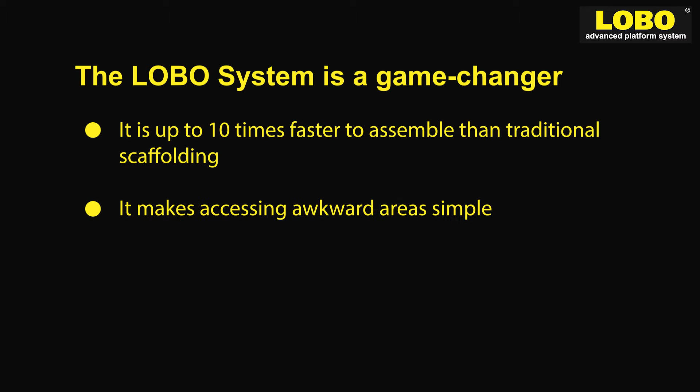LOBO Systems is a game changer. It's up to 10 times faster to assemble than traditional scaffolding. We want to make accessing your awkward areas simple, reduce your cost, and increase safety with our tried and tested training program.

Now these units are currently vertically aligned. You can put them horizontally and you can fit wheels to them. So Paul is now going to take some product out of the smallest Towerstore we have.

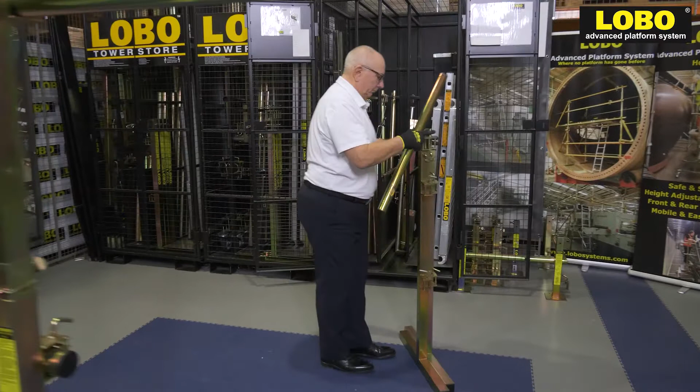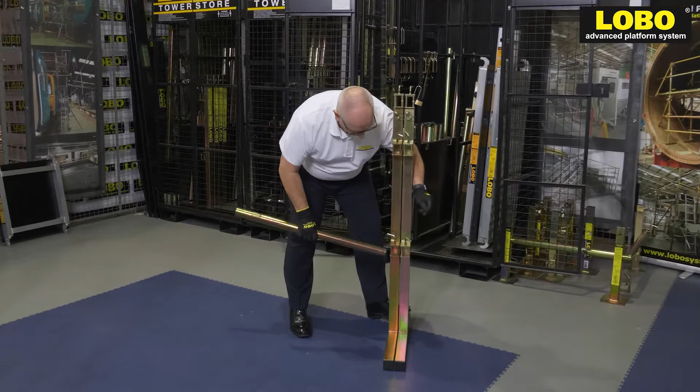As you can see, that's 2 legs. LOBO is in fact a steel system, very strong, and it assembles by sliding the tube into the clamp, which are then tightened by your fingers.

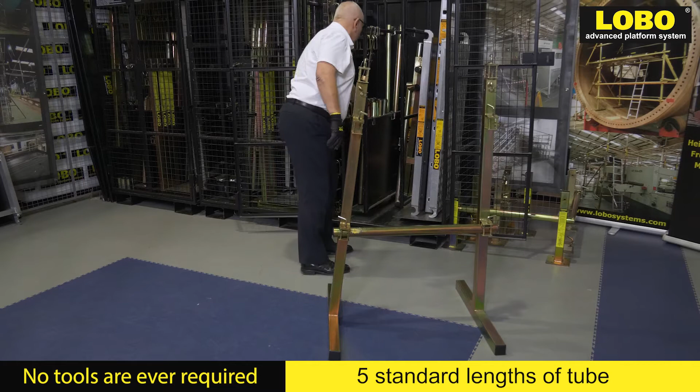No tools are ever required, and that length of tube is one of 5 standard lengths that we provide, but you can have custom cut to suit your applications.

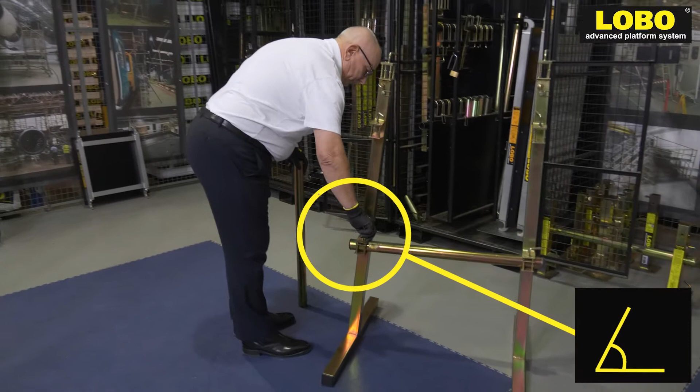The important thing to grasp is that the leg can be positioned anywhere you like on the tube, making the width of the product totally adjustable. Paul's going to now tighten the second L-bolt, and you'll notice the system is in fact self-aligning.

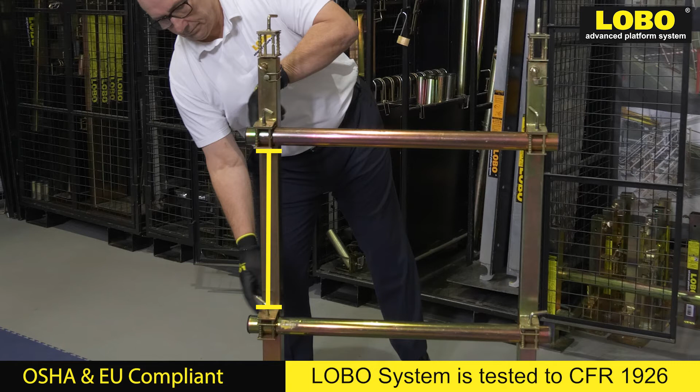Building the product is easy. You slide tube into the clamps, and the clamps have been positioned in accordance with OSHA CFR 1926. The whole product has been tested to CFR 1926 and is OSHA compliant.

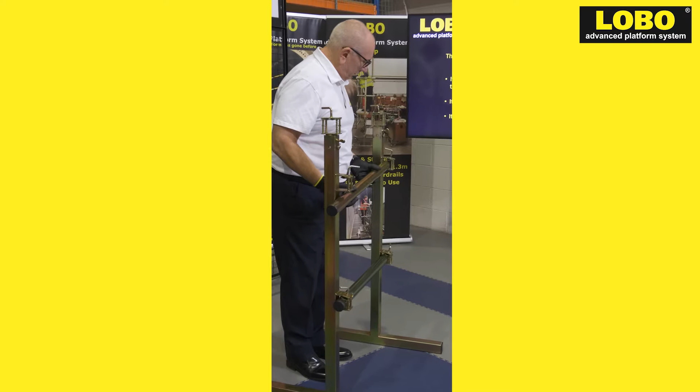What Paul is doing now is showing you that you can actually build LOBO from within. So if you're in a confined space, maybe a staircase or inside a vessel, in between 2 machines, you can often build LOBO around you, and you don't necessarily have to step outside the system to build it. So that's one system done there.

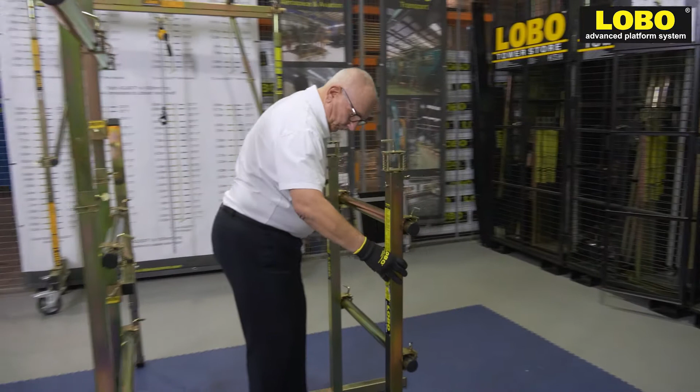Now we're just going to briefly explain, on the left here. We've done this to save a little time, but this system is relatively small by our standards. We can build LOBO around a tailplane of an aircraft or around a ship. It's as big as you want it to be.

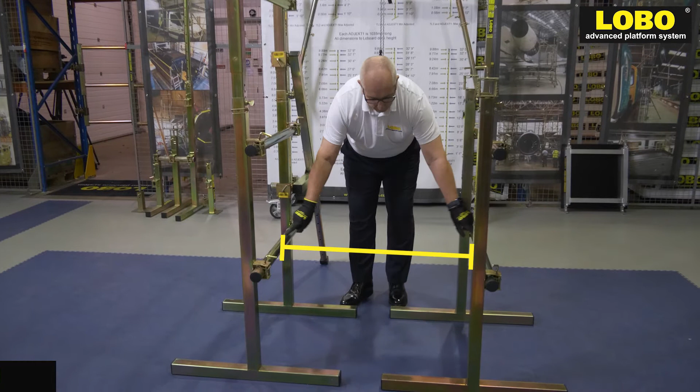But this system is actually ideal for explaining the safety aspects and how quick it builds. That distance there we call the span or length of the product, and that is adjustable from 2 foot all the way up to 12 foot in 2 foot increments.

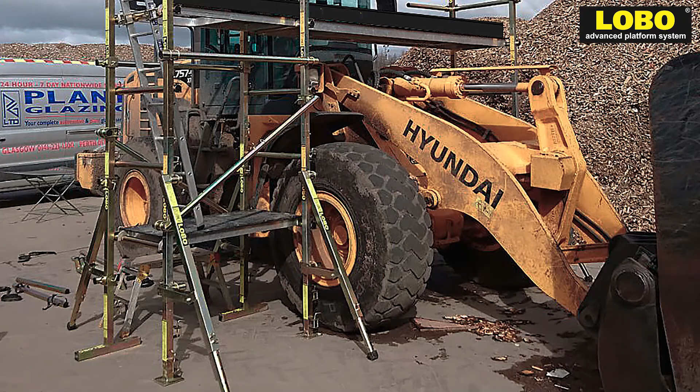So in that span you would see the conveyor, the machine, the aircraft, the helicopter, the jet engine, whatever it is you're maintaining. And we do it with these different size LOBO boards, non-slip on this side, aluminium framed on the other.

This is what a 1 foot board looks like when compared to a 2 foot, and these are the 2 width options that we provide.

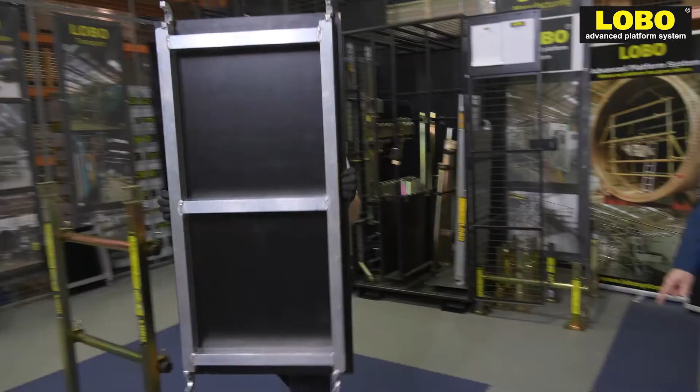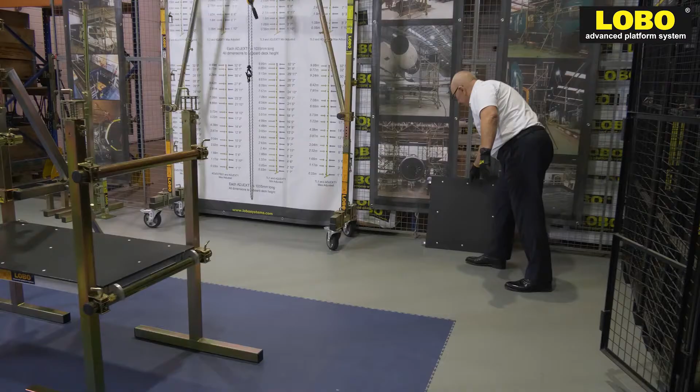Now Paul's got the 4 foot LOBO board, which is obviously relatively small by our standards, but however very popular. Now if this was the 6 foot board or the 8 foot or the 10 foot, you'd still do this to adjust it. So LOBO can actually be made infinitely long by adding more LOBO boards like this.

More LOBO boards, more legs, more tubing can go on the length infinitely, and you can do exactly the same on the width. By adding more boards, legs and tubing, you can make the product as wide as you want, as long as you want, and of course as high as you want.

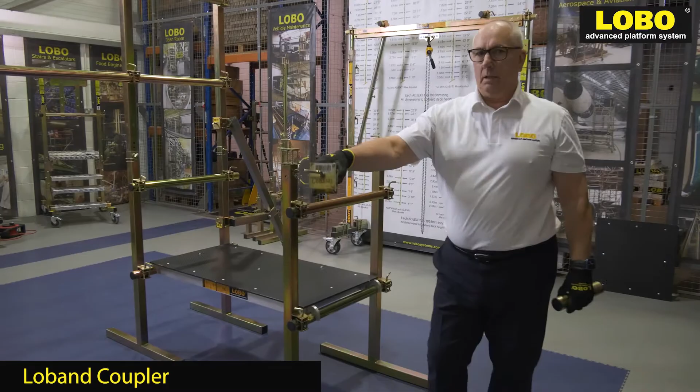Before we go into that, we're just going to introduce this coupler. It's called a Loband coupler, and what it does is it couples round tubing to square tubing in seconds, no tools required. Just like that.

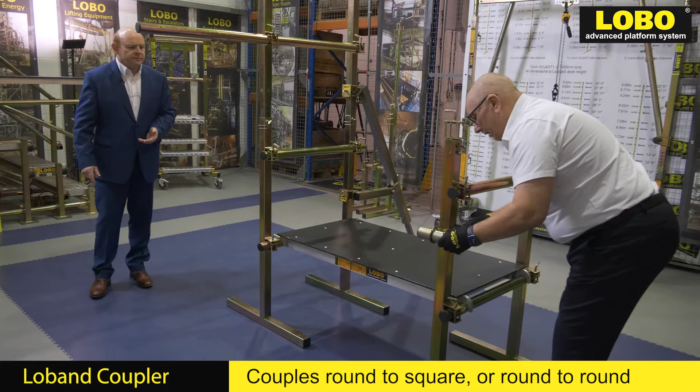It'll also couple round tubing to round tubing, just like that, in seconds, no tools required. Now this little coupler is hugely important to us because it'll make your system very small or very big, but rock solid. It'll also increase the safety.

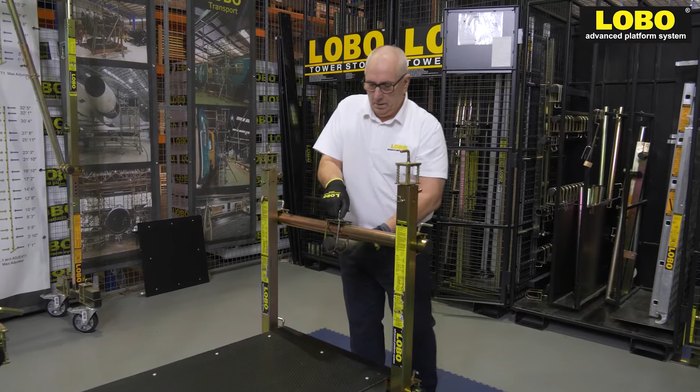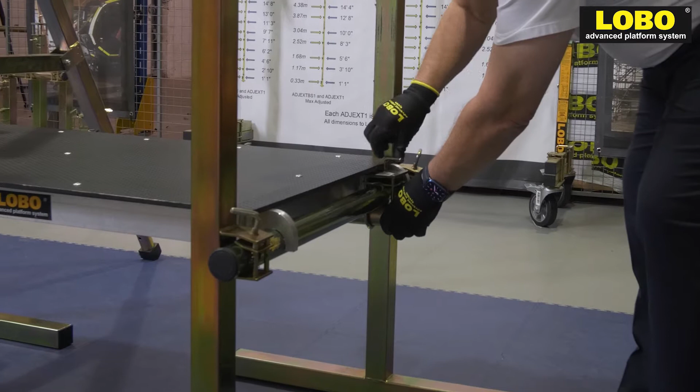So what we're going to do now is show you how we lock the LOBO board down by using the LOBO band and a piece of tube. As you can see, it will not lift up and it will not slide on the tube. This means you can actually position a LOBO board anywhere on the length of a tube.

The next thing we're going to show you is how quick and easy it is to fit a guardrail. That's a guardrail tube going on there.

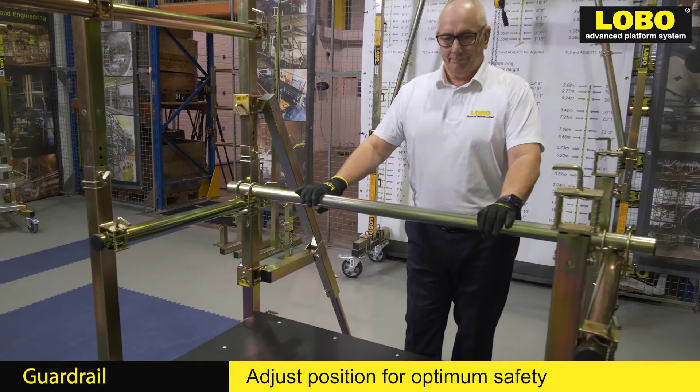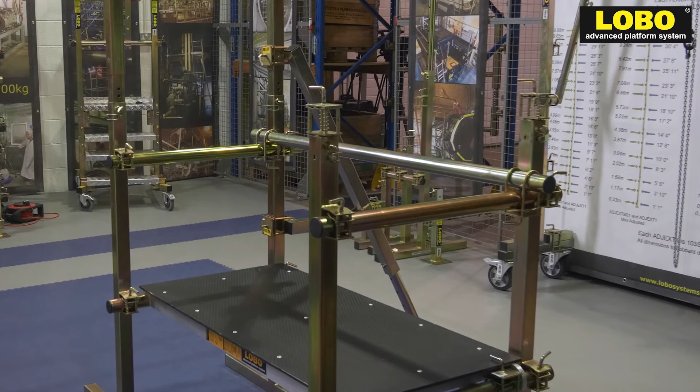Seconds later, it's now on the system, and what we're going to do now is show you that you can actually adjust the position of the guardrail to maximize your safety requirements for your specific applications. When you have it exactly where you want it to be, all you do is tighten up the L bolts. Now with that LOBO band coupler, you can actually fit a guardrail anywhere you wish on the system.

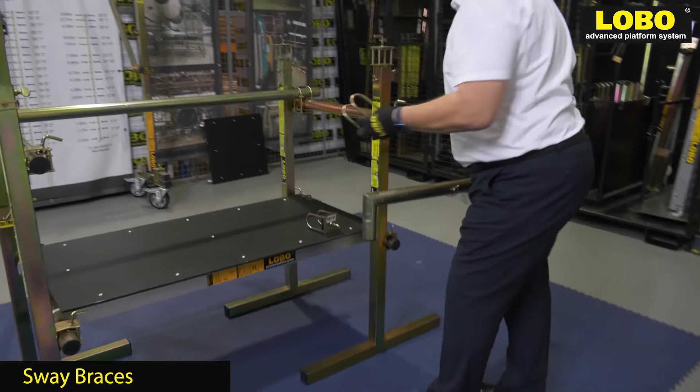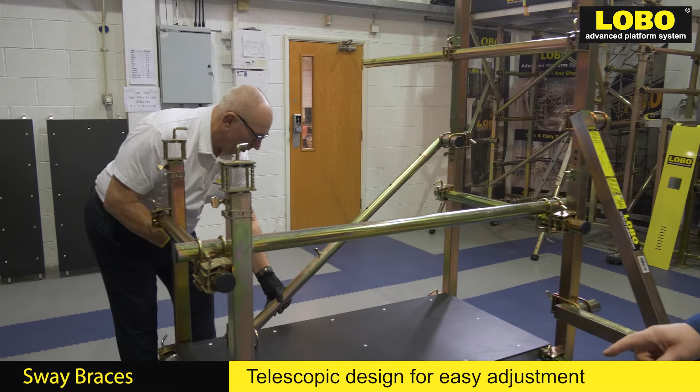Now, because LOBO can be made into a very large system, we need to use these sway braces. This is in fact the smallest sway brace that we have. There are two larger sizes, but they all go on the same way, in seconds like this. If you look at this, you'll notice that it's actually too short. Not a problem. We can take the pin out and telescopically adjust this so that it ends up touching the leg, fitting exactly where we want it to be, and then we simply take a LOBO band and connect it up. It's that simple, it's that quick.

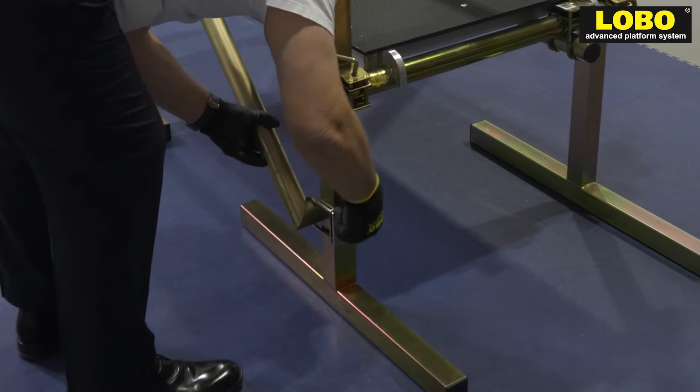Now if you look at this system from here, you'll see this cross piece here, we call sway braces, allow you to make a rock solid system to a maximum of 30 feet freestanding.

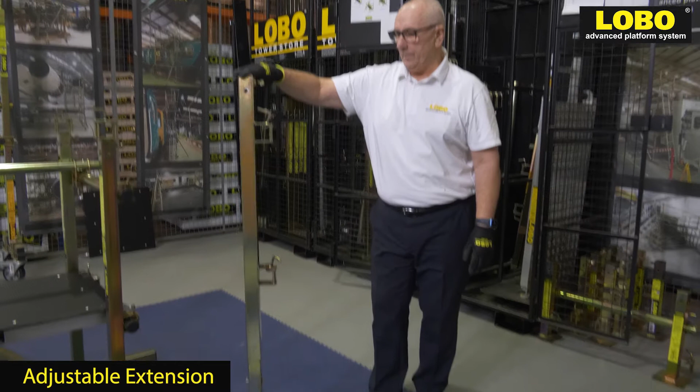To get to 30 feet, let me show you the extension piece. This is in fact a steel component and adjustable at the bottom.

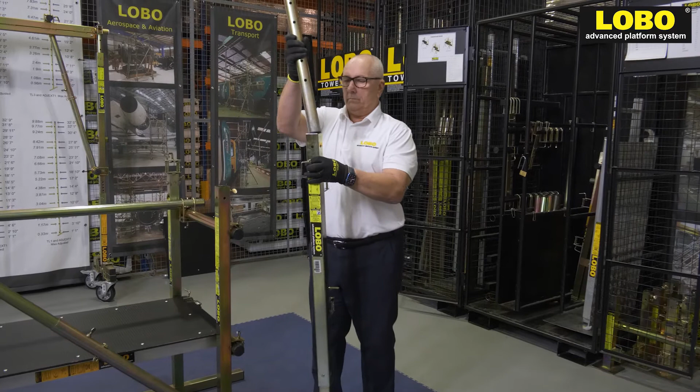Now we have a process for putting this on, or fitting this. It's called the advanced guardrail process. Don't worry too much about the detail. It's fully covered in our training program.

But what it really means is as you build the product, there's always a guardrail in advance of you for safety. If we approach and do the audio test, and then we turn it off, we can actually see we're building a rock solid system, noiseless, and that's exactly what we're looking for. And then we simply fit the adjustable extension in the top of the leg.

So now we're going to show you how the product adjusts. You can see there we've got 1 foot of adjustment in 1-inch increments, and this is available every time you put one of these components on the system, all the way up.

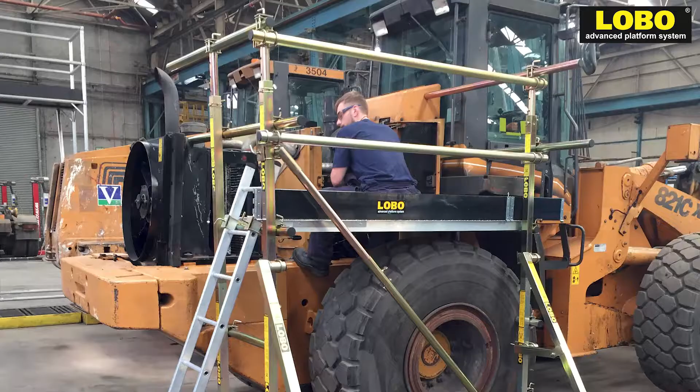Now as you can see, Paul's setting that side to 2 holes. If you come to this side of the system, you'll see that's 2 holes too. Why? Well, because we're on flat or level ground. If we weren't on flat or level ground, we're on a slope, a step, escalator, tiered seating, just different levels within the plant or facility, you could set one side of the system different to the other to achieve a level platform.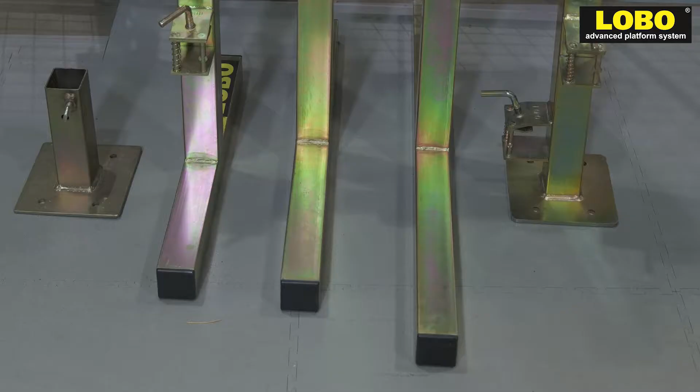If you don't want to do that, then the other option is to use our different leg sets. The little number 1, the medium number 2, and the large number 3 we're using. Now, since all our legs are interchangeable, you can mix and match to get the most perfect system to suit your requirements.

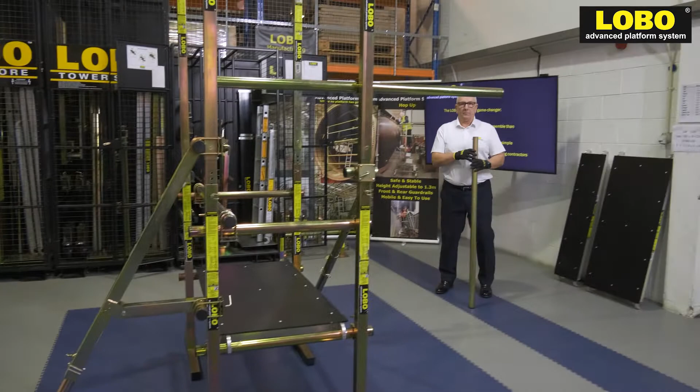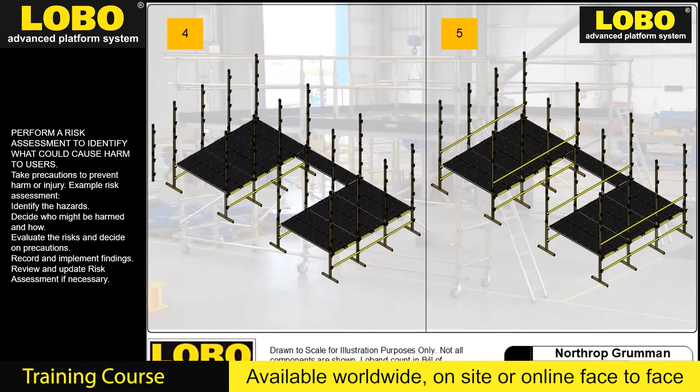Now, as a responsible manufacturer, we've developed our own training course. This training course is available worldwide, on-site or online, face-to-face. Once you've completed the course and passed the test, you are then deemed competent by us, the manufacturer, to be able to build your system, inspect it for safety. You need to record that fact, and then it's safe for everybody to use.

To go to the next level, we simply take more tube from the Towerstore unit, which we fit onto the next clamp. Now that tube that Paul is about to fit is exactly the same as this guardrail tube, so you're not going to get confused about which tube to use.

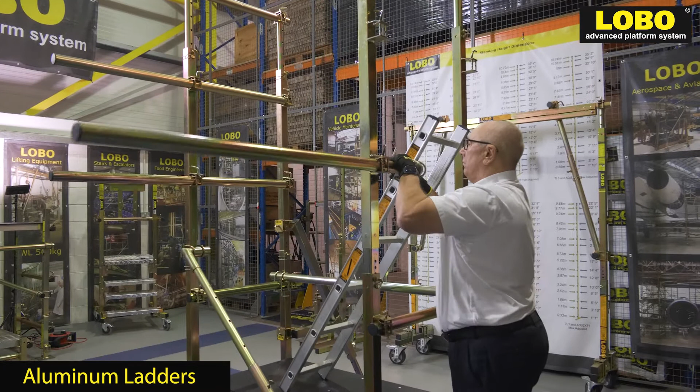To get to the next level, we use aluminium ladders as the cheapest option that we have. Now, the aluminium ladder is from a range of ladders that we have. What's important is the use of the LOBO ladder clamp.

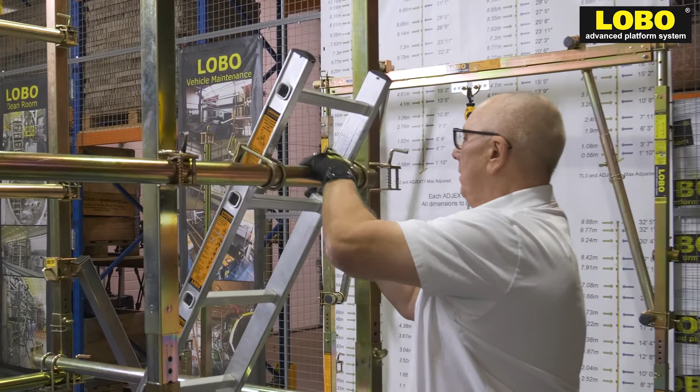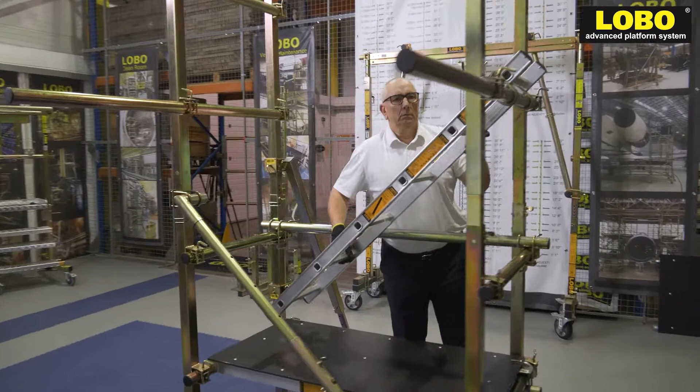The ladder clamp, in fact, we're going to use 2 ladder clamps. And once we've tightened up the L bolts that Paul's now doing, that ladder will not come off the system. But you can see it can be adjusted to suit the application, and then you simply tighten up the L bolts, and then it won't move.

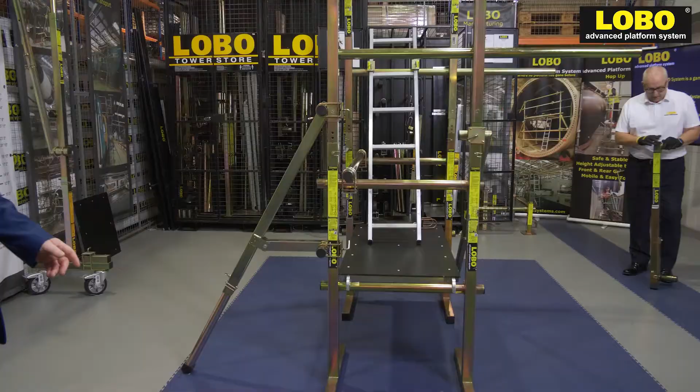What I'd like to do now is explain a safety aspect that we have for the product, which is the height to base ratio. As an example, this width of the system here is 32 inches. The maximum we can stand at is 3 times 32, which is 96 inches, right around 8 foot.

So what do we need to do to go higher? Well, the first thing we can do is we could take that tube out and put a longer one in. This leg would move out to the end of the longer tube, thus giving us a wider system.

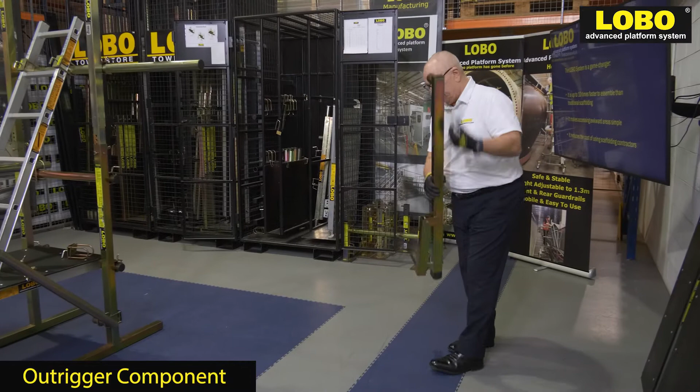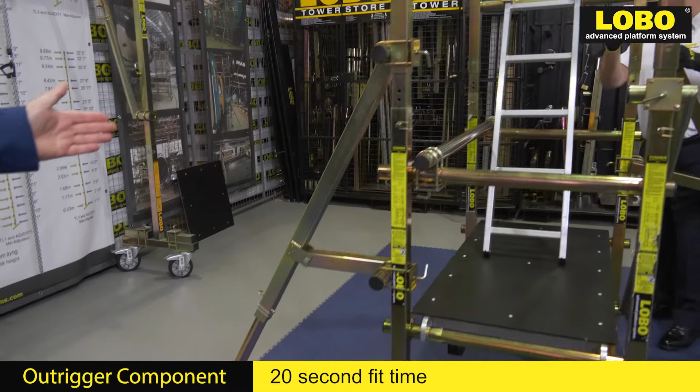If you can't do that, you need to use an outrigger component. This is a steel component. It has a 20-second fit time, as we're about to show you, and we've put one on this side to save a little bit of time. As you can see, the 20 seconds is up, the outrigger is fitted, and we're going to deploy the rubber foot. That gives us another 36 inches on the base.

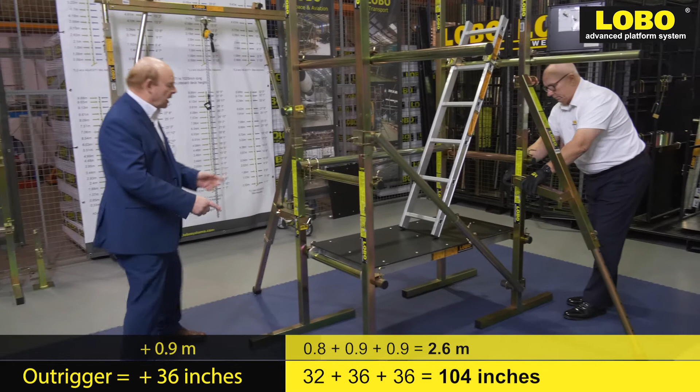36 inches now, with an additional 32 in the middle, and the one we put on previously gives us another 36 inches. That gives us a total new base dimension of 104 inches, which, when multiplied by 3, which is a safety factor, you can now stand at 26 feet.

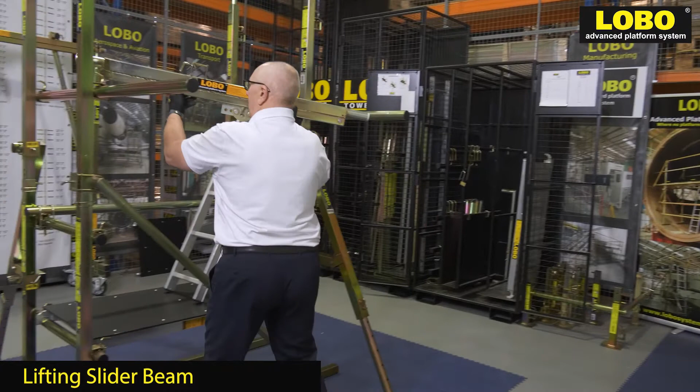Another component we like to show at this point is the lifting slider beam attachment. This is in fact the 4-foot version, and we're using the 4-foot because we have a 4-foot Loboard. They're a matching pair. However, we do have 5 different lengths of this product. The next one would be the 6-footer, which we've set up here.

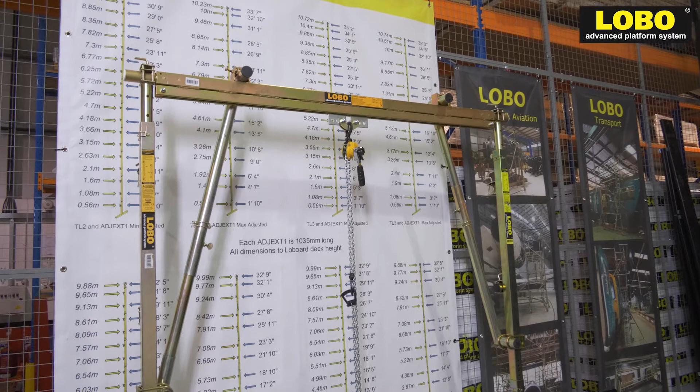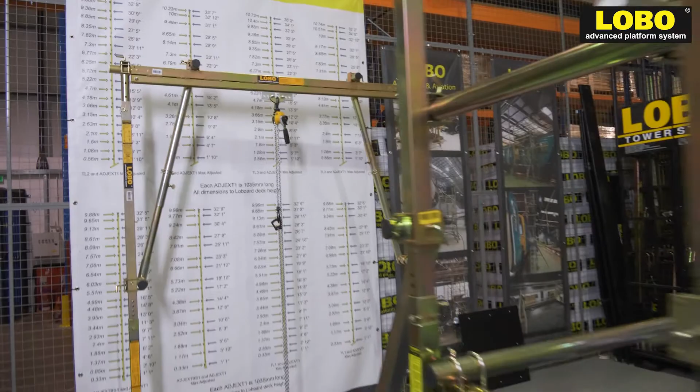Now, we've set this up slightly differently because we wanted to explain that it can be set up freestanding, and in this case we've added a wheel kit. However, returning back to the integrated version, you can see that Paul's put a Loboard on to integrate it on the product. It comes with a certificate of 1,100 lb safe lifting load, and you get that certificate every time you purchase one, and also it's a slider beam.

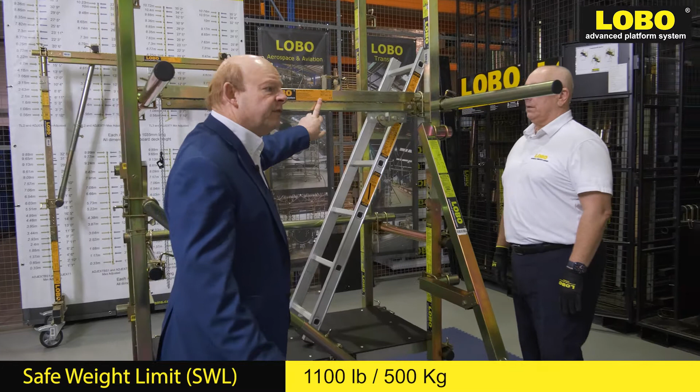Now, the slider beam means if you've got compressors, motors, tools, anything that you want to get up the system or bring down for repair, you now don't have to carry them up and down the ladder.

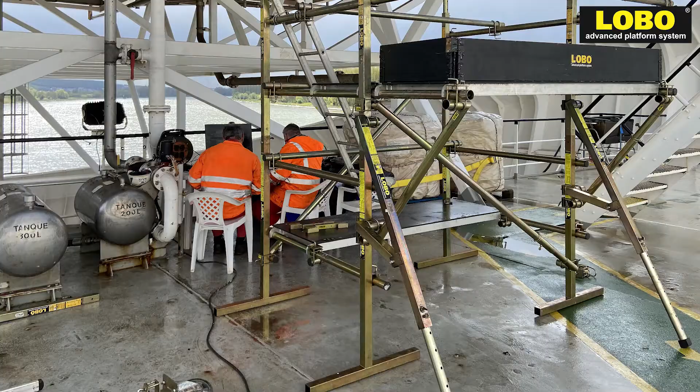The next thing we want to explain to you is the cantilever. This tube here and its friend on the other side is the basis of a cantilever that we're going to build right in front of you. Now, following certified training by us, you can put this height at anywhere you want on the system. And the cantilever gives you the opportunity to stand outside of the main system footprint.

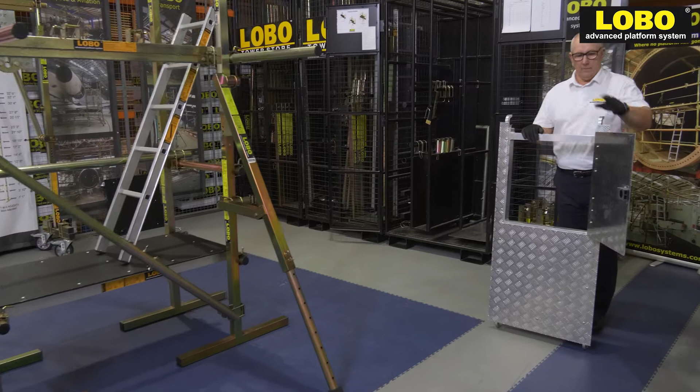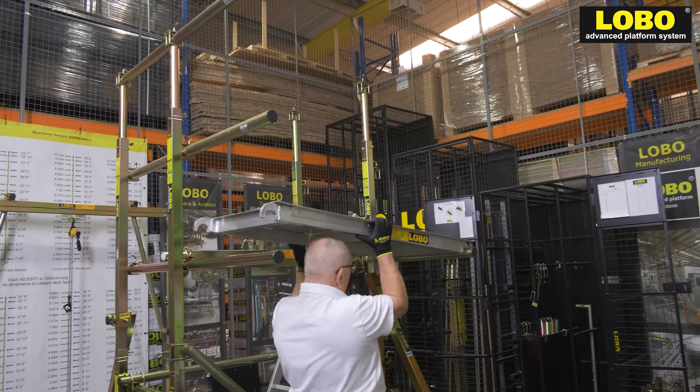And the way we're going to build it is using an alternative Loboard top. This is in fact aluminum, and it has an aluminum frame on the back. Now, it is exactly the same Loboard as before, complete with a hatchway. We've just got a different Loboard aluminium top. And that's going to fit perfectly on the system. Now, it fits perfect on the system because LOBO is a premium system and everything fits properly to everything else.

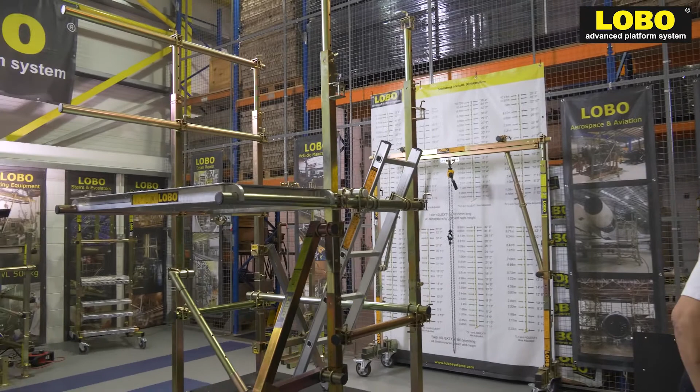What we need to do, though, is to make this tube load bearing. And the way we're going to do that is using a sway brace. So this sway brace can be fitted up, like that, or from the underneath. Now, this component is not new to you. It is exactly the same as the one we put on earlier, so hopefully you'll remember it's telescopic, and we draw it back to the main leg and simply connect.

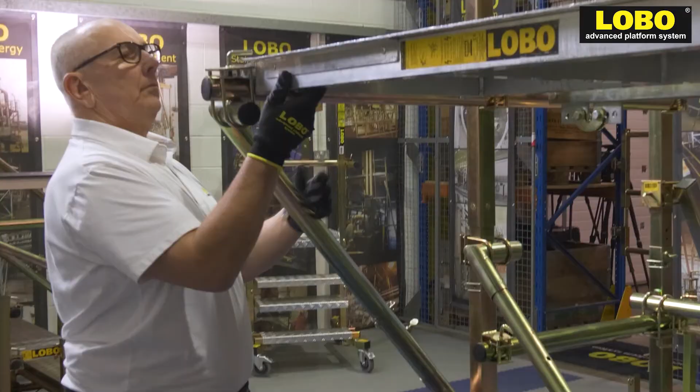We'd like to also show you the safety features on this, and if you look at this, the Loboard cannot lift up, and clearly it cannot come off the system, so it is secure.

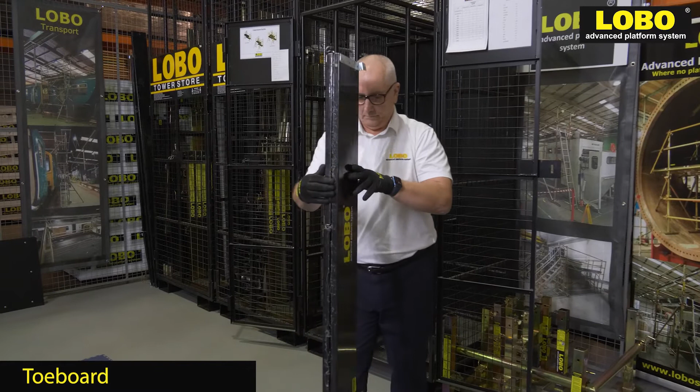The next thing we're going to show you is the toe board. The toe board is steel reinforced, it is hinged, and we have one of these for every size of the Loboard we produce, and they fit around the edges like this.

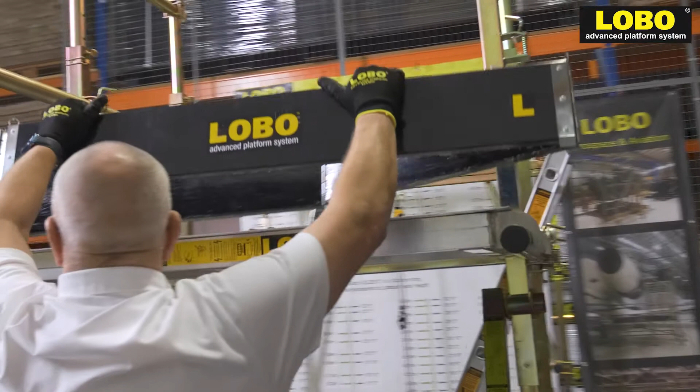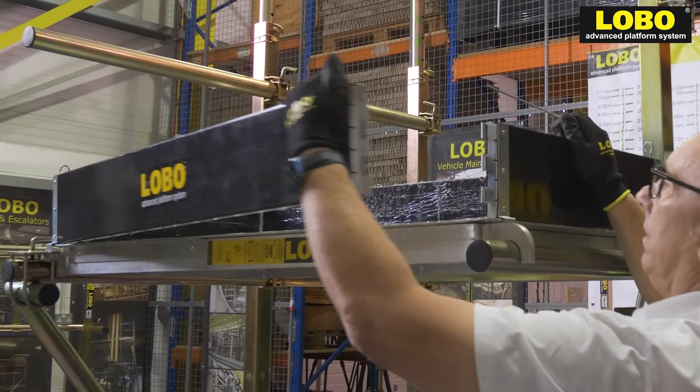Now, if you look at the corners, there is in fact a pin, which when Paul takes the pin out, you can actually remove the side of the toe board, replace it or resize it with no problem at all.

Finally, we have a toe board clip, which you put on in seconds.

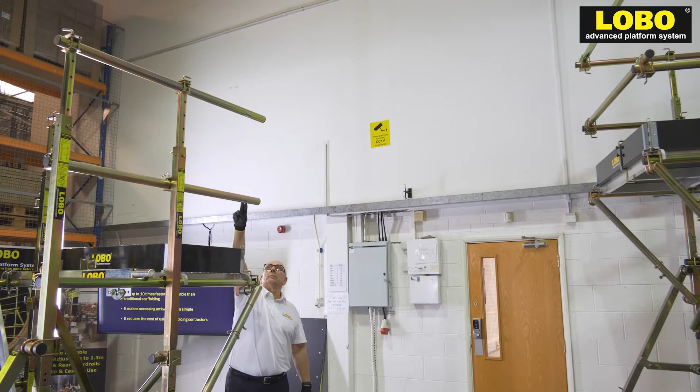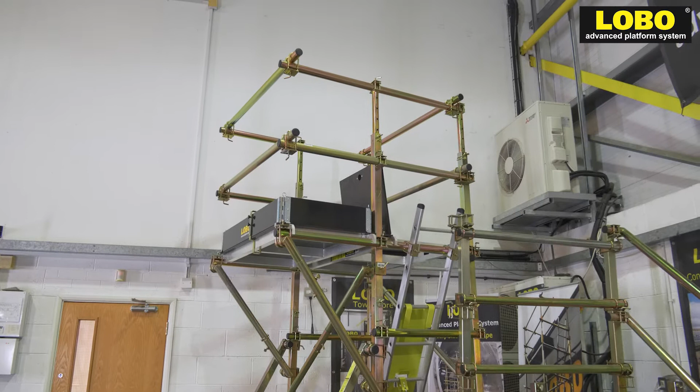Those tubes there and above are the start of a guardrail system that you would fit to stand on the cantilever, and it would end up looking like that. You can see that you're fully guarded. You've got the top handrail, left, right, centre, intermediate, left, right, centre, toe board, low board, working down the system.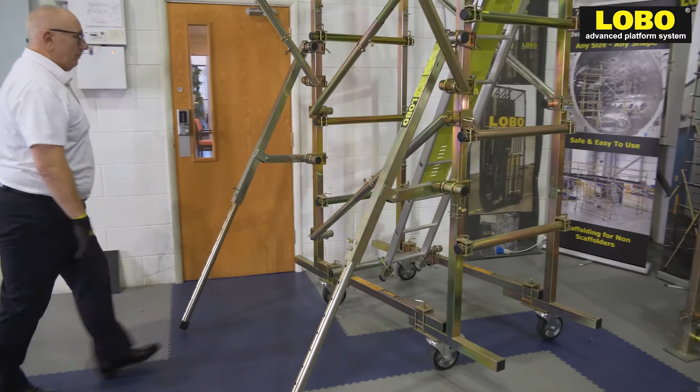You can see we've actually fitted wheels. Once the brakes have been released, your product is now mobile. And wheels are completely optional - you can have them and you can fit them when you need them. The wheel is with the bracket. Apply the brakes, and the wheel with the bracket looks like that, and you can see how the four wheels are fitted to the trestle legs.

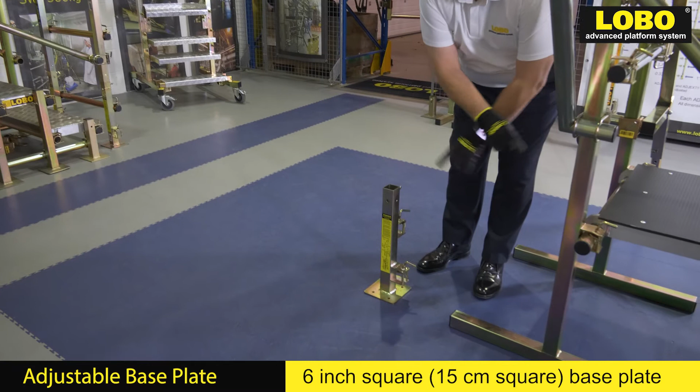This is the LOBO adjustable base plate. It is a 6-inch square base plate, totally interchangeable with all the legs that we have, so you can build off the base plate no problem. Looking more closely at the base plate, you will see there are in fact 4 holes for permanent mounting, or you can put a wheel kit on.

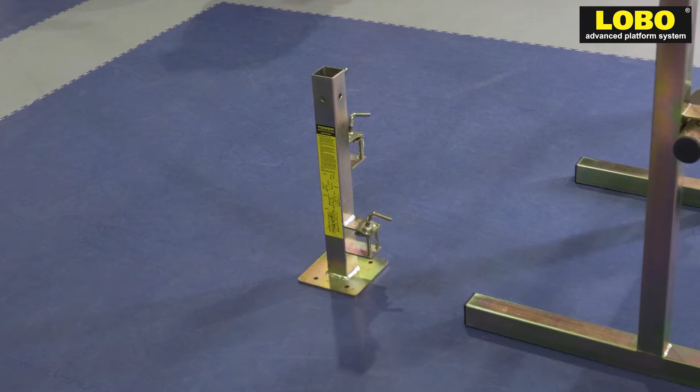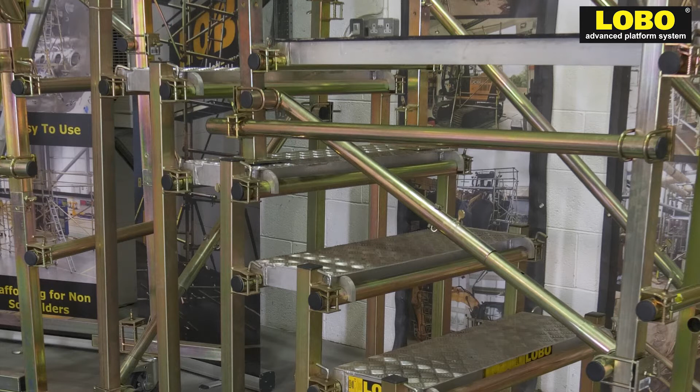And a typical application for the base plate would in fact be the staircase. As you can see, it fits perfectly on the tread of the staircase, and also we've made this absolutely level, fitted on a staircase as an example of how the base plate can be used.

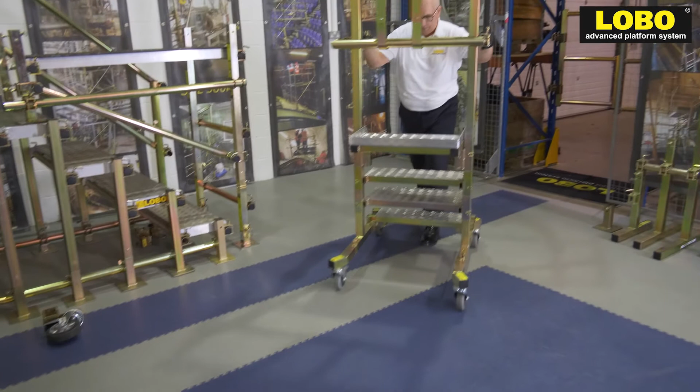This is the LOBO single person podium, perfect for underwing maintenance inspections or rolling around the facility, the plant floor. Once the brakes have been applied, you'll see there is a fail-safe guardrail which falls behind the operator, complete with top guardrail, optional tool tray, intermediate rail, toe board on the bottom. This is height adjustable up to a maximum standing height of 5 foot.

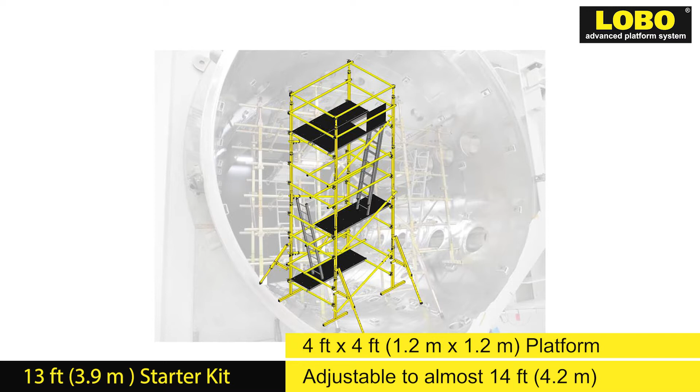So this is the 13-foot LOBO starter kit. It's adjustable to almost 14 feet with a 4-foot square platform at the top. Now, following LOBO certified training, 1 to 2 people could build this platform in less than 30 minutes.

Now, if you were to stand the LOBO starter kit next to an aluminium tower or standard tube and clamp scaffolding, from a distance it would look very similar, but up close we've shown you it's very different. And here's another reason it's even more different. You could take this starter kit apart and, using the same components, rebuild it as this, or this, all from that same versatile LOBO starter kit.

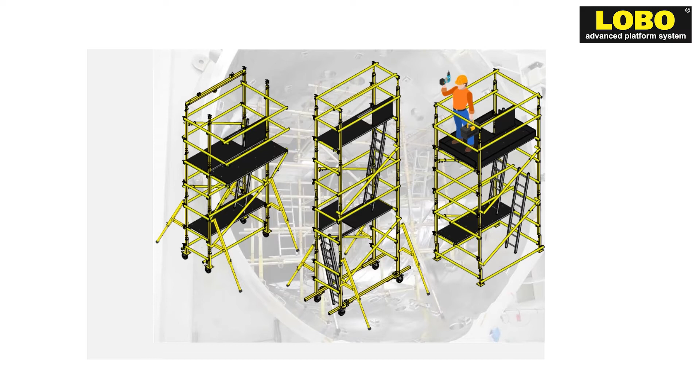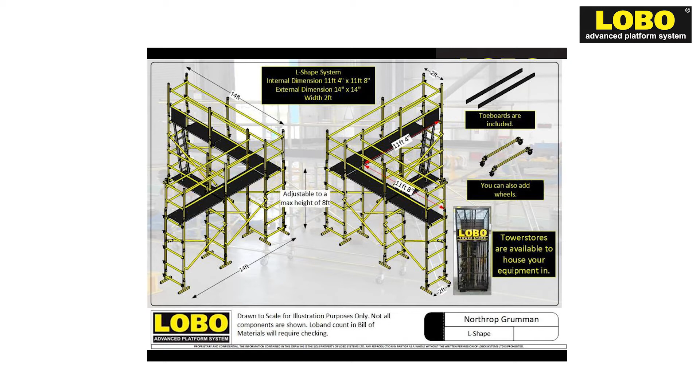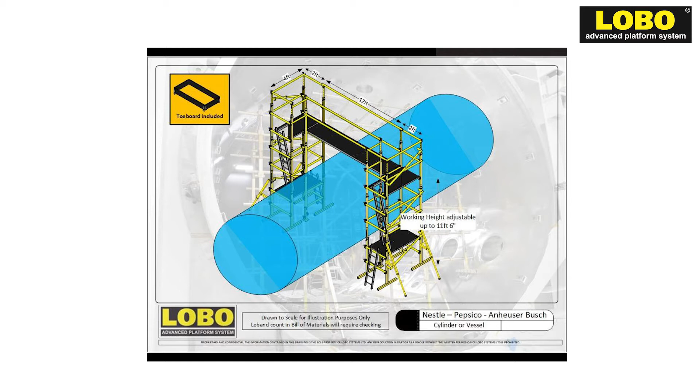Once finished with it, take it apart, flat pack it, put it away, and rebuild it in these different configurations and many other shapes and sizes.

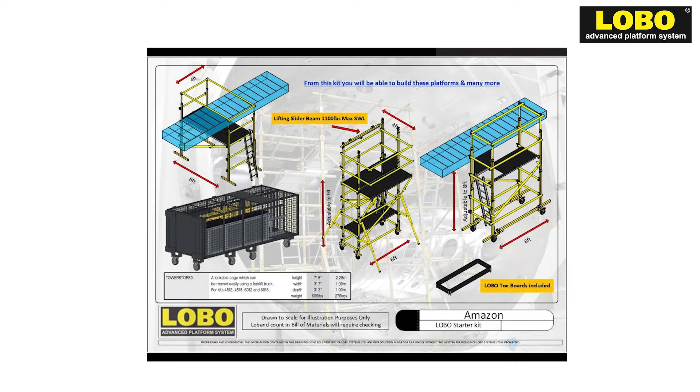Now, if we were on your site, I'd be saying take me to some of your working at height problem areas. I take some basic dimensions and some photographs, and from those photographs and dimensions I produce a LOBO solution for each and every area you took me to.

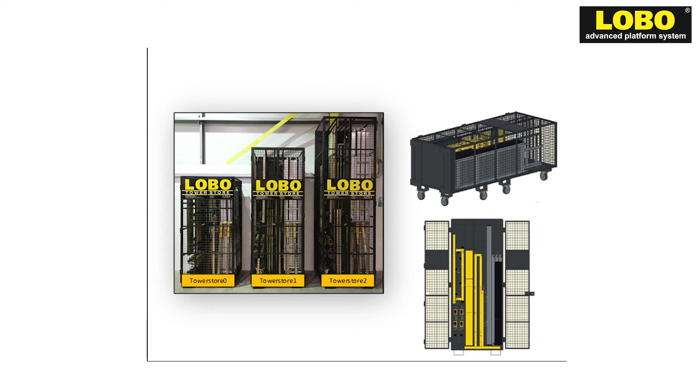From those drawings I can then produce what we call a LOBO pool of kit, and from that pool of kit you'll be able to build any one of those platforms at any one time. Also, now I know what kit you require, I can right size one of our steel tower stores to safely secure your system once you've finished with it at the end of the day or the end of the job.

And very finally, this is page 1 of a 3-page document that we use to share information with our customers so we can start to be able to produce some LOBO solutions for you. Just to give you an overview of the kind of thing I'm looking for, number 1, the standing height - that's the distance from the floor to where your boots are or to where your feet are. Number 2, the system length and width.

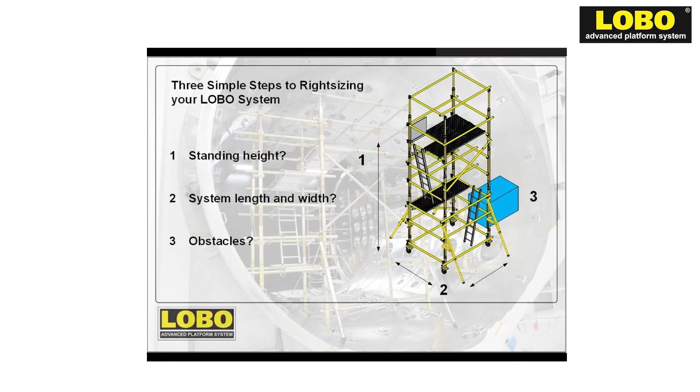Lengthwise, the boards start at 2 foot and go up in 2 foot increments right up to 12 feet long. Widthwise, 1 board, 2 boards, 2.5 boards - depends what obstacles you've got to overcome and how many people you want on the platform at any one time.